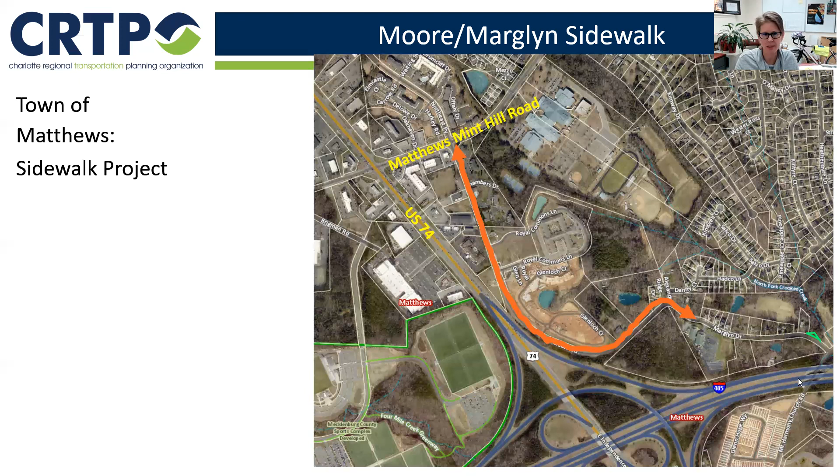On the northern part of that orange line is the new apartment complex that Bainbridge built. Then as you move eastward along that orange line, you pass Royal Park, which is age-restricted housing under construction with new apartments and new townhomes. Moving eastward again, you now see we're entering the single-family residences. Next slide.

This slide demonstrates the existing gaps in the sidewalk network. Black is where there's existing sidewalk. Blue is sidewalk that's currently being installed by development, and green are the gaps in the system.

The project limits, as mentioned before, are from the existing sidewalk near Matthews Mint Hill Road north of this to the sidewalk that exists on Marglyn. The gaps from Marglyn Drive to Mount Harmony Church Road might have the opportunity to be completed with redevelopment. That was that big open area you saw on the previous slide.

By connecting these gaps, residents in the single family neighborhoods would now have uninterrupted pedestrian access to the Greenway, commercial, Butler High School, and church. In addition, people staying at 2 hotels in the senior housing and apartments would have more continuity in the pedestrian system. We found that in Matthews, more residents in active adult communities and apartments prefer to have the option to travel by foot or by bike, and this project would provide modal choice to residents.

That's my 5-minute presentation in 1 minute and 45 seconds. I don't see any questions in the chat box, but are there any questions that I can answer at this time?

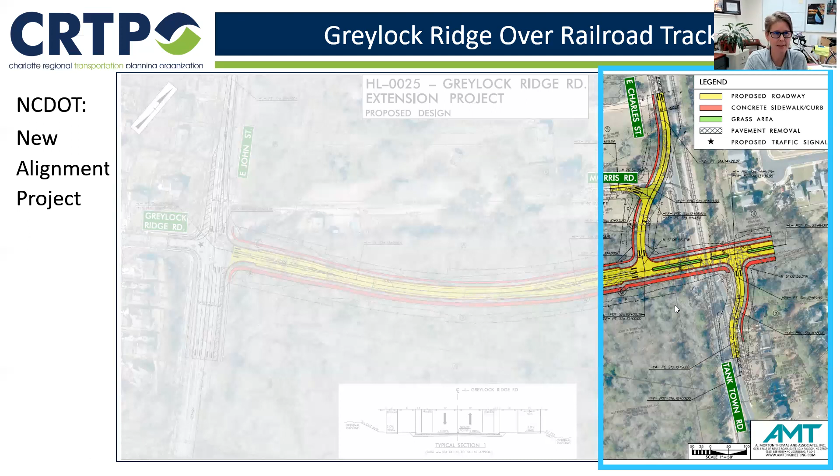And then there's this little diagonal crossing, and Tanktown continues on paralleling. There's a sidewalk along both Charles Street and Tanktown. And so pedestrians are crossing through this skewed crossing. So you have the railroad, Charles, Tanktown, and pedestrians all merging in that space. Next slide shows you a little bit better how that is.

So the current Greylock Ridge Road BA project can be successful on its own. However, with this extension to Tanktown Road, a safer and more efficient crossing of the railroad track can be realized, especially for the vulnerable modes, making for a more complete project. I'm wondering if there's any questions you have at this time.

Bill Thunberg has a question: can we get construction authorization by 2024? Is it better to revise the scope of the existing project or make it a separate project as far as management or delays? So the state is the project manager on this project, and they believe that with this extension, they can get construction authorization by 2024.

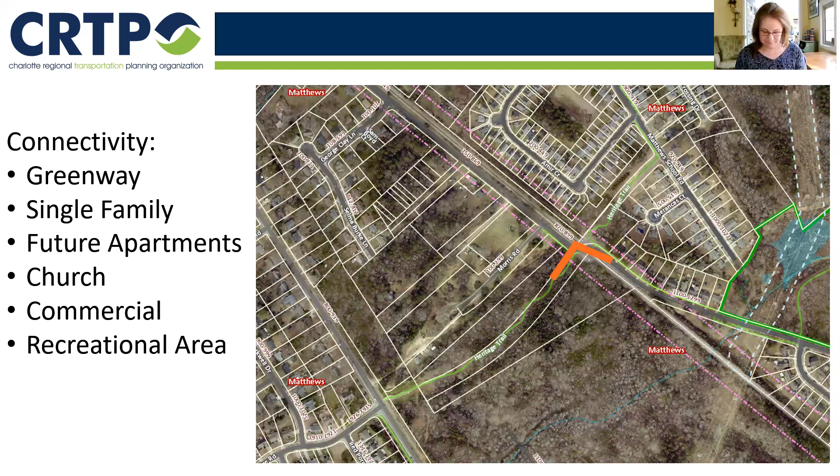Hey everybody, hope you're having a great afternoon. This is Keith Bryant with the Charlotte Department of Transportation. We have 4 exciting projects that we want to present to you. All 4 of them are not new projects per se, but they're new in terms of the CRTPO funding process, so they're all new projects. There's 1 ped bike category and 3 in the roadway category.

So without further ado, I'm going to kick it over to Paul Benton to talk about the I-277 Rail Trail Bridge project. Paul, take it away.

All right, thanks Keith. So the I-277 Rail Trail Bridge project is a 16-foot wide bridge project that will connect the current terminus of the rail trail today at East Morehead Street to the Stonewall station across 277 on the CATS Blue Line. So this is a 16-foot wide pedestrian and bike bridge that links South End and Uptown. It crosses the barrier of I-277 and completes a really critical connection in Charlotte's rail trail.

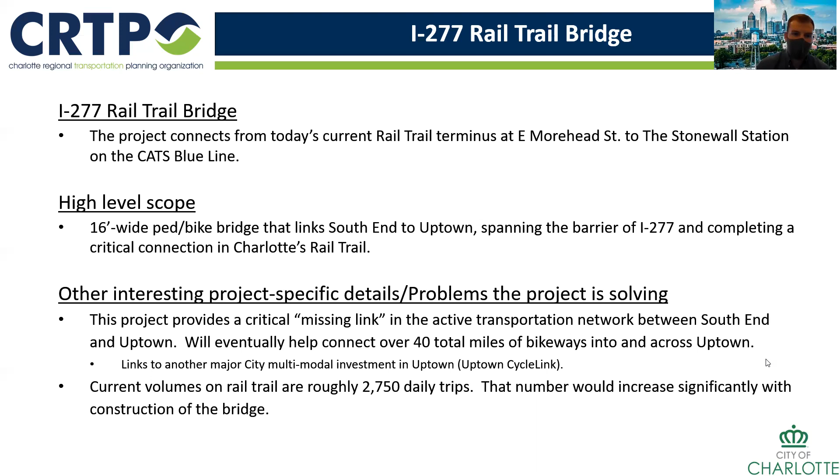If you could jump to the last slide, please.

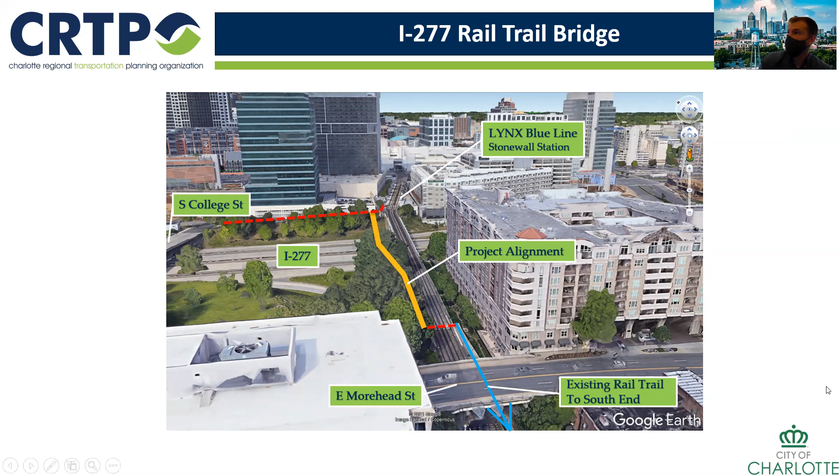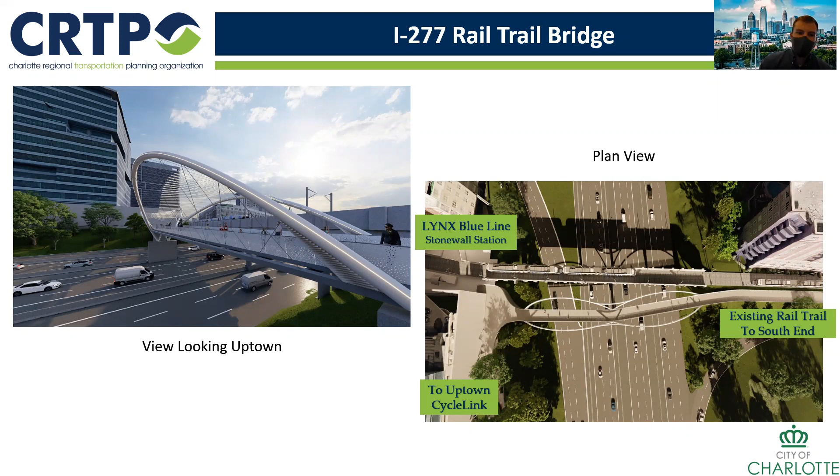So with that, I'll hand it off to Tom Sorrentino to talk about our next project.

Okay, thanks Paul. Good afternoon everyone. My name is Tom Sorrentino, I'm also with the Charlotte Department of Transportation. I'll go over the Robinson Church Road project and give an overview of that.

The Robinson Church Road project consists primarily of safety and congestion improvements at two key intersections: Robinson Church Road and W.T. Harris, and Robinson Church Road and Plott Highland. Both intersections are currently experiencing congestion, delays, and excessive queuing during peak periods, and this is expected to worsen as development occurs along the corridor.

There is a fair amount of development activity occurring, including subdivisions, single family and multifamily, and there's a lot of vacant land that is rapidly filling in.

At the W.T. Harris intersection, we're looking to extend the left and right turn storage lane lengths to accommodate very heavy left turns, right turns, and a southbound U-turn movement. The southbound left/U-turn storage is being increased to 435 feet, and the westbound left and right turn lanes are being increased to 400 feet to accommodate those movements.

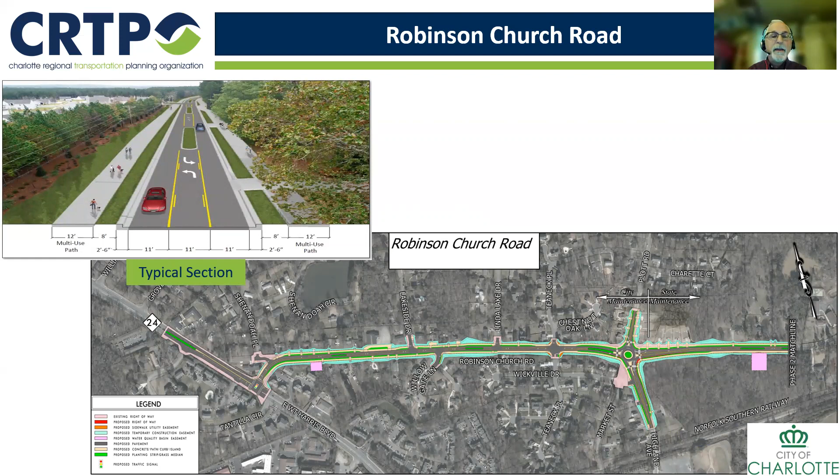Any questions about that? If not, the W.T. Harris project is up next.

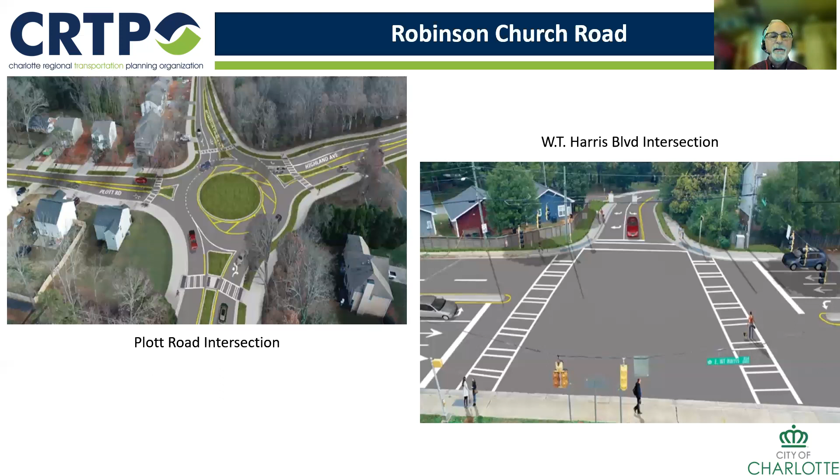So Jennifer, I'm the next one on the docket, and just to help keep us on schedule, I'm going to jump into the W.T. Harris street lighting project. Again, my name is Anthony Mendez. The limits of this project overall are from Mount Holly Huntersville to I-85, to the I-85 North ramp. The scope of this project is to ultimately install approximately 560 lights along the corridor of a roughly 8-mile section of W.T. Harris.

The project is ultimately going to be solving a significant safety concern in the corridor. Currently, 5 out of the 7 subsegments of the limits of W.T. Harris rank in the city's top 40 of the identified lighting projects. I'll go into a little bit more detail about how we got that information. Some raw data is that over the last 5 years, we've seen approximately 243 crashes in the corridor that have resulted in either fatalities or injuries.

To kind of quantify the benefits these improvements would have, when looking at NCDOT's crash modification factors for street lighting countermeasures and comparing them to the existing crashes, we would expect to see a reduction in crashes of upwards of 48%. When you do a benefit cost analysis looking at crashes over the course of 10 years, we'd see approximately a 17.7 ratio. That's ultimately comparing the cost of the existing crashes to the reduced cost of the new anticipated crashes. For gauging that ratio, anything over 12 is considered a really strong project. Jennifer, if you could advance to the next slide please.

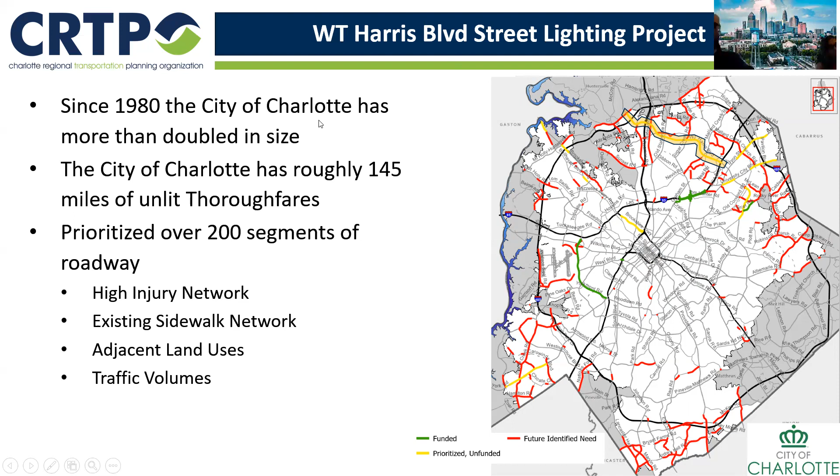Okay, thanks Jennifer. Good afternoon, my name is Aaron Pratt, and I'm with the Charlotte Department of Transportation. I'm here today to provide an overview for the Eastway Drive Shamrock Drive intersection project that was submitted as a new roadway application. The project is located east of Uptown Charlotte and north of Independence Boulevard.

The scope of this project is to reconstruct the existing Eastway Drive Shamrock Drive intersection and build 2 new quadrant roadways, resulting in 4 new signalized intersections for the corridor. The existing intersection is a 5-leg skewed intersection that shows up on the city's high injury network, experiencing congestion and safety issues for all users in the area.

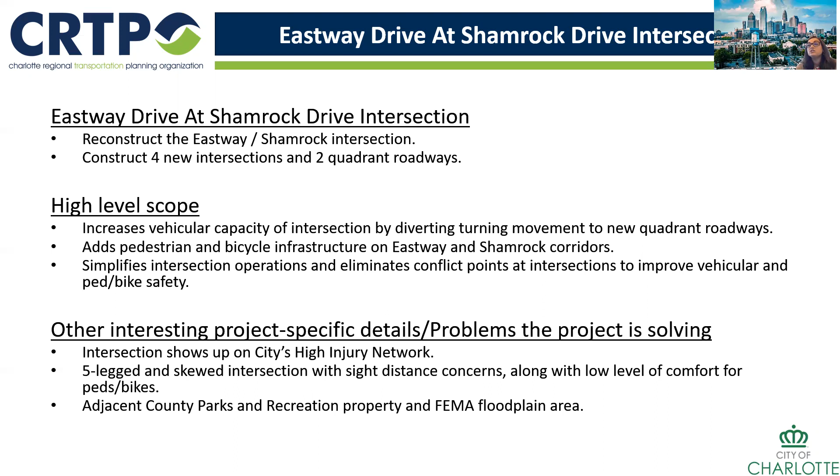As mentioned, we are proposing to reconstruct the existing intersection and build 2 new quadrant roadways, the 2-lane roads running perpendicular to Eastway Drive and Shamrock Drive, which will allow us to remove the left turning movements from the main intersection. If you're on Eastway Drive and want to turn left onto Shamrock Drive, you will use the quadrant roads, and at the main intersection make a through movement. This allows the main intersection to have through and right turning movements only.

This type of improvement will help improve the capacity of the main intersection by removing the left turn signal phase and giving the added green time to the through movements. The left turn lane removal will also help reduce crashes that historical data has shown to occur at this intersection. Historical data identified various crash patterns, but the most common crash occurring was between right turning vehicles on Shamrock Drive and cars making illegal lefts into Frontenac Avenue.

If you're not familiar with this intersection, the left turn lanes marked on Eastway Drive are actually supposed to go to Shamrock Drive, not Frontenac Avenue. So what's happening is cars from Eastway Drive are turning left into Frontenac Avenue, creating a conflict with right turning vehicles from Shamrock trying to turn right onto Eastway Drive. The removal of the lefts will remove this conflict and allow vehicles to navigate safely through this intersection.

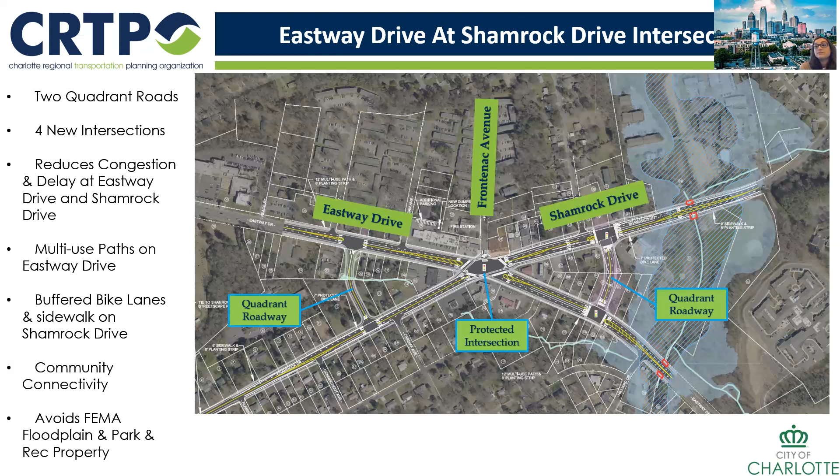My name is Stephen Trott with the town of Huntersville. Wow, looks like there's a lot of great projects out there from other places. So I'll throw another one into the ring.

This is a great opportunity for a much needed project that's multimodal in Huntersville. The project we're excited to present is the NC 115, or Old Statesville Road project, between NC 73 and McCord Road in the northern central part of Huntersville.

So the road's pretty much getting to its vehicular capacity point. Also today, there's disconnected sections of sidewalk and no separate accommodations for bicycles. The MTP assumes the section of road is to be widened by 2045. I'm going to guess when the next iteration of the MTP comes out, it's likely that's going to be pushed even further out. So without some funding help, the corridor will likely remain in its current state for another 25 plus years.

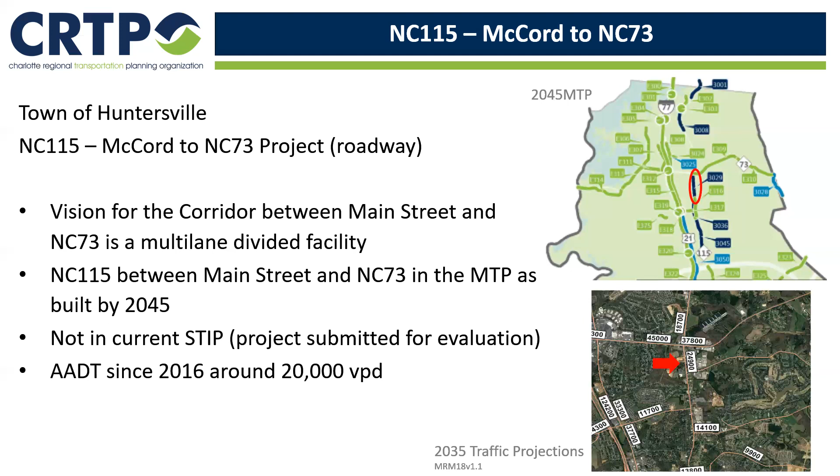As we're finding out with most other projects in town, the current culvert under that low spot is a bit undersized. Not quite as bad as other projects, where for instance the current culvert is about a quarter of the size or smaller than it really should be. Not quite that bad here, but definitely undersized, so that needs to be upgraded to reduce the risk of overtopping.

The development pattern in town sounds like other projects from other places. We've got a church, park, a school, affordable senior housing, and various other developments, businesses, and things such as a pharmacy. So a lot of uses in this area. Bike and ped accommodations are not present but needed to connect everybody together. You really can't walk between anything out here without walking in the road itself.

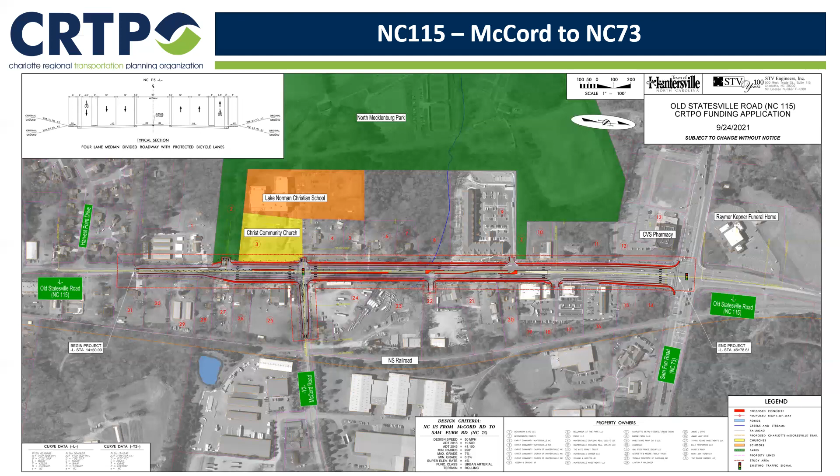So this is a pretty significant project and one that really needs to be done, and we really could use the assistance doing it. Thank you again for the opportunity today to present, and would be happy to spend any remaining time to answer questions.

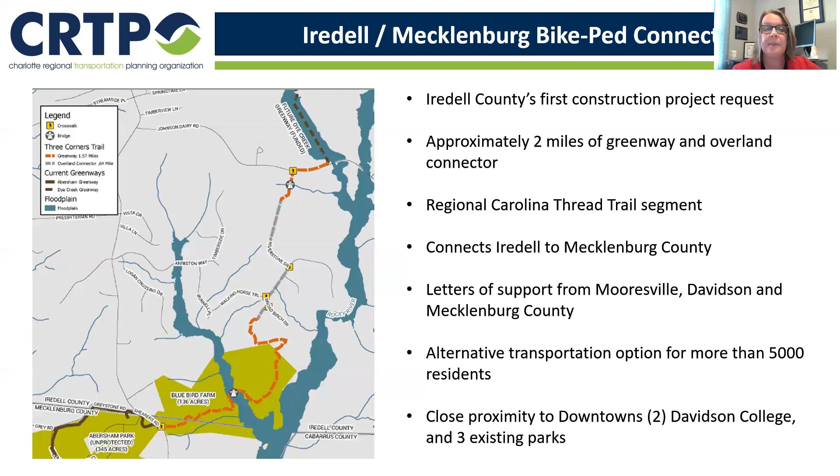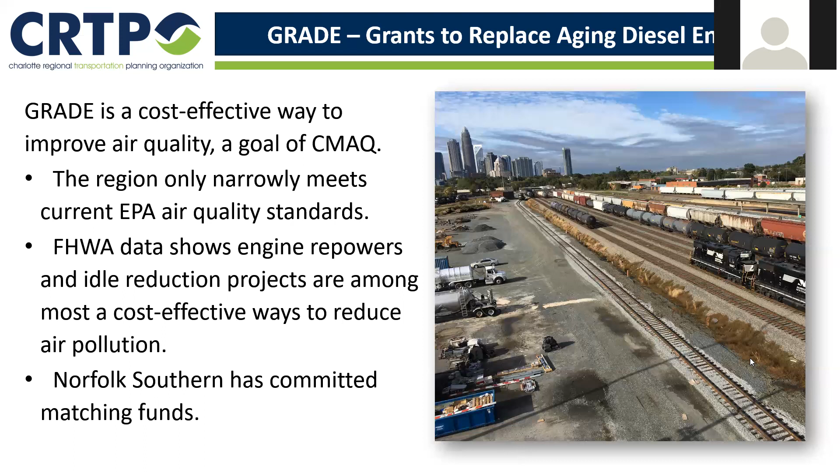Hi, good afternoon everyone. For those of you who don't know me, my name is Joyce Figueroa, and I am a park planner for Mecklenburg County. Mecklenburg County submitted one new bike ped project for Irwin Creek Greenway, flowing from Clanton Road to Lester Street. This project would add approximately 1.4 miles of trails to the existing 1.7 miles of greenway and provide off-road connectivity to parks, schools, community centers, and the surrounding community.

The existing Irwin Creek Greenway connects great amenities such as the West Boulevard Pocket Park, Revolution Park, the Revolution Sports and Learning Academy, Charles L. Sifford Golf Course, the Clanton Park, Barringer Academic Center, and the Arbor Glen Recreation Center. This Greenway project would extend the existing Greenway from Clanton Road to the Amay James Park and Community Center at Lester Street, and would also connect to the Reed Neighborhood Park and the Reed Park Academy.

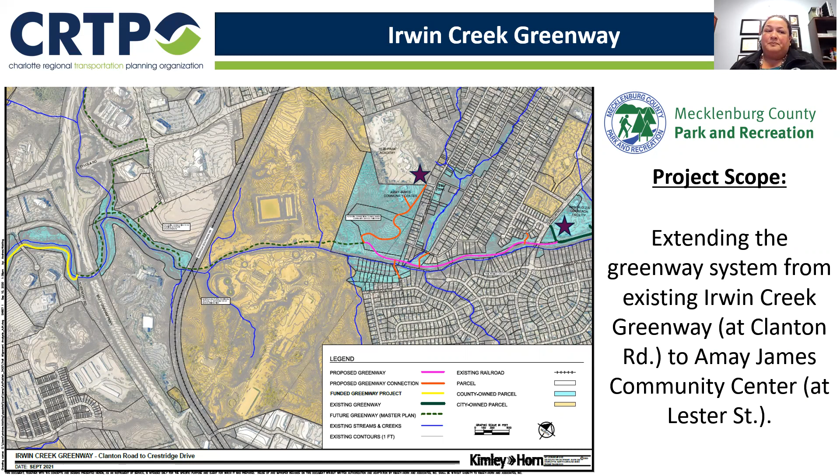This Greenway project is of great importance at a local and regional level. Regionally, this Greenway is part of the Seam Trail, formerly known as the Mooresville to Charlotte Trail. A current planning study has extended this regional trail system to approximately 50 miles of contiguous trails connecting from Statesville, North Carolina to the South Carolina state line. The Seam is part of the Carolina Thread Trail, and once fully developed, it is projected to be the longest trail network in the area.

At a local level, this transportation and recreational trail will provide a high degree of impact to a community with higher than the regional average concentration of African Americans, Latinos, poverty, limited English proficiency, and carless households. This Greenway project will provide direct access to high concentrations of carless households and populations at greater risk for chronic disease, with social determinants such as 25% of residents living below the poverty level and 22% with less than a high school diploma. We believe this Greenway project will be a great asset to its surrounding community and to the region as a whole.

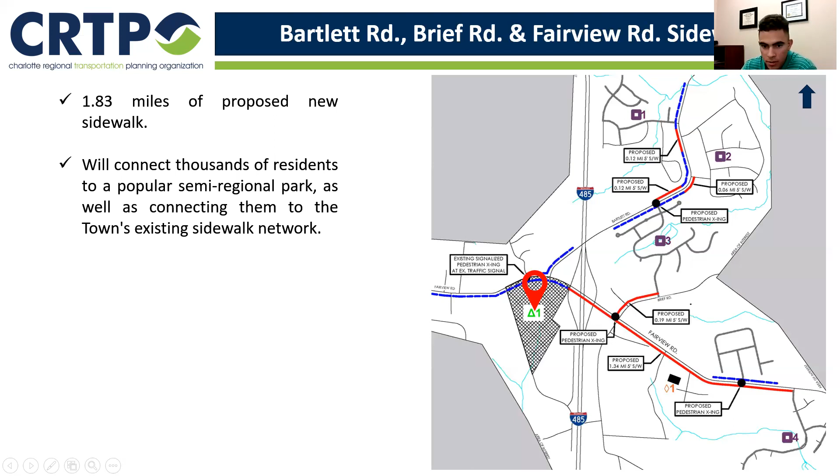So I'll leave it open for Steve or anybody who has questions on this one. If not, we can move ahead. Thank you. Okay.

Okay, so this is our Lawyers Road and Thompson Road sidewalk. You can go ahead and move along. This is probably our most highly requested sidewalk in town by residents.

So what we have is 4 segments of sidewalk, beginning on Lawyers Road just south of Highway 51, and continuing down Lawyers Road until it eventually takes that right turn and continues down Thompson Road for a total length of 1.8 miles. The main focus of this project is to connect pedestrians to the Stevens Creek Nature Preserve, which is that big red marker down at the bottom.

It's a regional venue that just opened last year, actually, and it has miles of hiking trails as well as a nature center. Currently, as you can see by the existing and proposed sidewalk on the map, there's no pedestrian access. It's isolated, and there's growing demand for that here in town as residents want to access the hiking trails and everything.

Right now there is no way for pedestrians to even walk down Thompson Road, with there being no defined space. There's really tight shoulders and slopes. So in addition to the nature preserve, thousands of residents would be connected to the town's existing sidewalk network again.

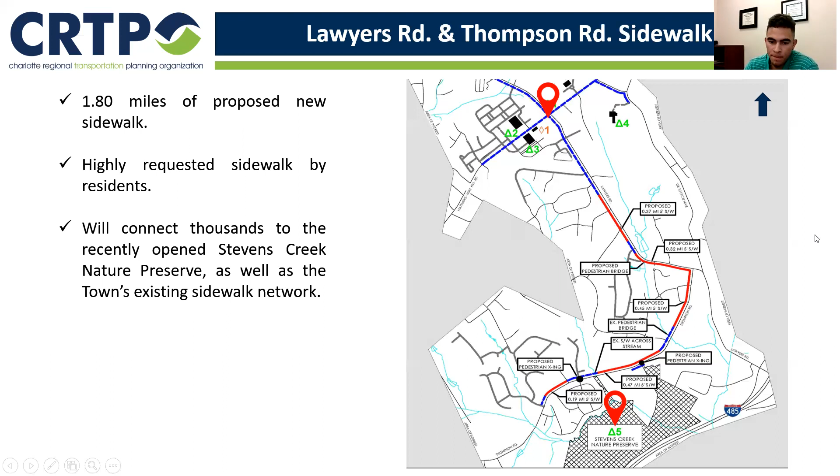All right, lastly, we have our Lebanon Road and Margaret Wallace Road sidewalk. This project would total just under 1 mile of new sidewalk beginning on Lebanon Road, where it will connect to existing sidewalk that was just completed by the town. We're aiming to get Lebanon Road finished and connected to the network.

It also includes 2 segments along Margaret Wallace, where there are currently gaps in the sidewalk. That's where those red flags are on the map. In these 2 sections along Margaret Wallace, they've been traveled and used like sidewalks for years, and that's resulted in goat paths, which we've included pictures of in our submittal, but not here.

This stems largely from the fact that there's a very large apartment complex there, the Orange Diamond #1, where we see a high volume of foot traffic as residents travel to grocery stores in either direction, and also to Lebanon Road Elementary School, the green #5. So you see people walking their kids to school down this stretch where there are missing gaps of sidewalk. We think it's very important to complete this sidewalk along Margaret Wallace and create a defined space for them to travel.

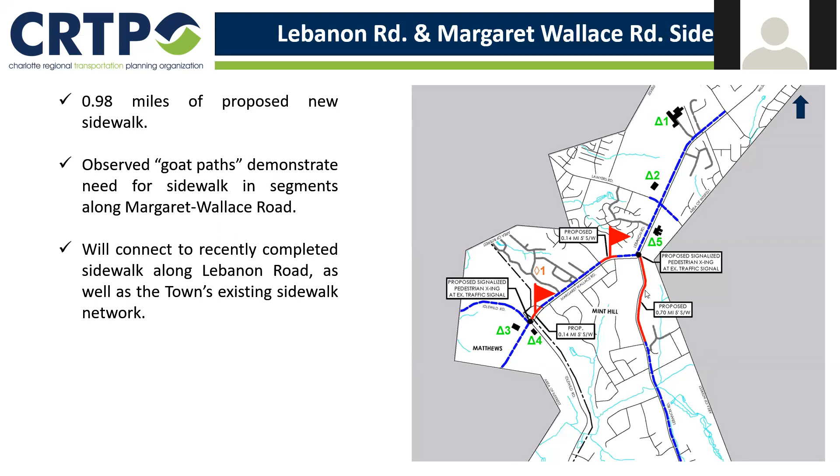That was great, thank you. Steve, thanks, did you have any final comments? No, I'm good, thank you.

Okay, thank you. Mooresville? Thank you. If we go to our first slide, please.

I'm really glad that I get to follow Megan Green, because she noted at the opening of her presentation that her project didn't fit into the box. One of the things that I love most about being in this organization is that coming to meetings like this, or just seeing all these projects come through, you always get good ideas from others.

Several years ago, I saw the City of Charlotte apply for a sidewalk package, and that is what this project is. We're calling it our Mooresville Graded School District Sidewalk Package. I just realized that this is part of that sidewalk package — we have 5 sidewalk segments, but we're having 2 packages.

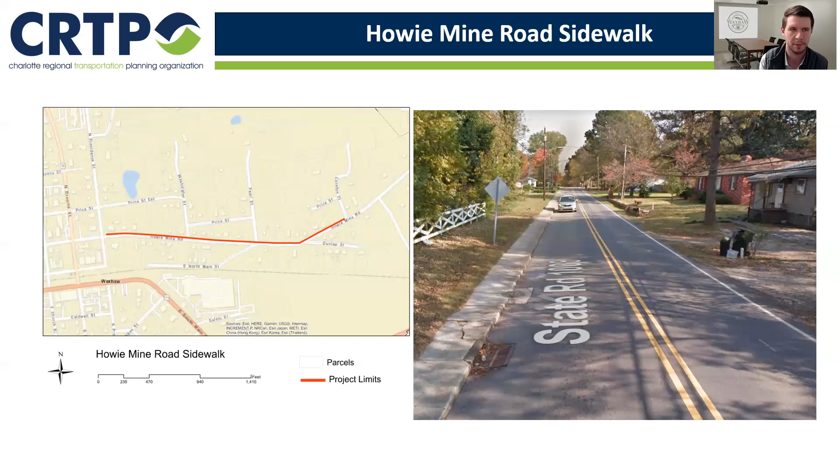Next slide, please. The project has been identified in multiple town plans, including the Waxhaw pedestrian plan, which is currently undergoing an update through an NCDOT bike and pedestrian planning grant. It was also prioritized in the master transportation plan, a CRTPO planning grant, and in the downtown neighborhood plan, where residents raised their voices about the need for improvement to the substandard sidewalk. It has been programmed and approved by our board as part of the fiscal year 2022 to 2026 capital improvement plan. Completion of this project will help Waxhaw achieve its goal of being a great place to live, work, and play. That concludes my presentation.

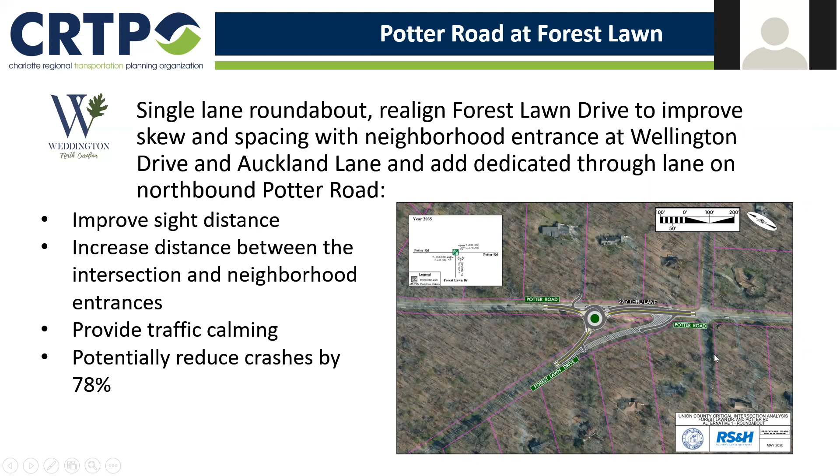I have lost my place. I appreciate the opportunity to present this. I obviously am new at figuring these things out, but I think it's pretty straightforward. Yeah, that was fine, and I think it is pretty straightforward. And so you did great. Thank you so much, Karen. Thank you.

So the next steps, again, we're back to the calendar. None of the projects have been scored yet. Staff is working on that, doing reviews of just the application and the estimates. At the end of the month, probably in a couple weeks, all the scores will go to the Project Oversight Committee. The Project Oversight Committee will meet twice in December and a third time if necessary. Information reports to the TCC, if we have any scoring updates, will certainly be presented at the first Thursday of the month TCC meeting.